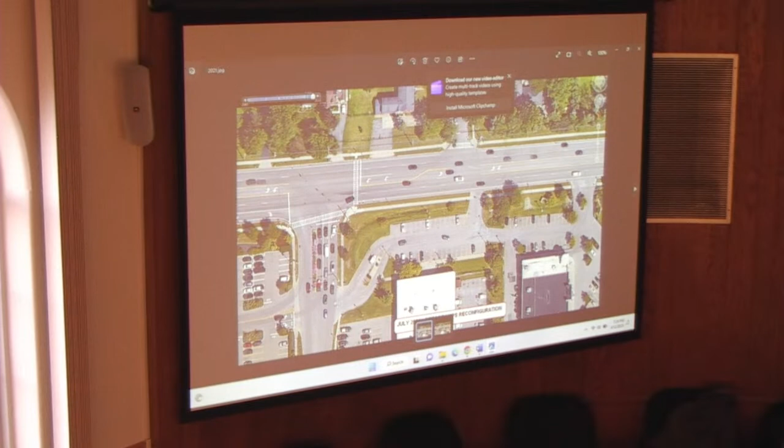So this is what it was, to remind everybody. Just an in coming off SJ used to have a drop-off collection right there, and it was still a no-left-out, but people still did not follow those instructions at that time. Ultimately it's what you see today, which is a more defined right-out. Although you can tell from the disturbance on the ground, people are abusing it and turning left out of there. But now you've got the ability to go out to SJ and utilize the signal to exit. In terms of what that did for accidents...

So this is years and years of accident data. There was a lot of accidents internal in the parking lot, but also at that intersection we're talking about now, Dan Troy and the Sheridan Drive curb cut. A lot of accidents at SJ. Not so much anything here.

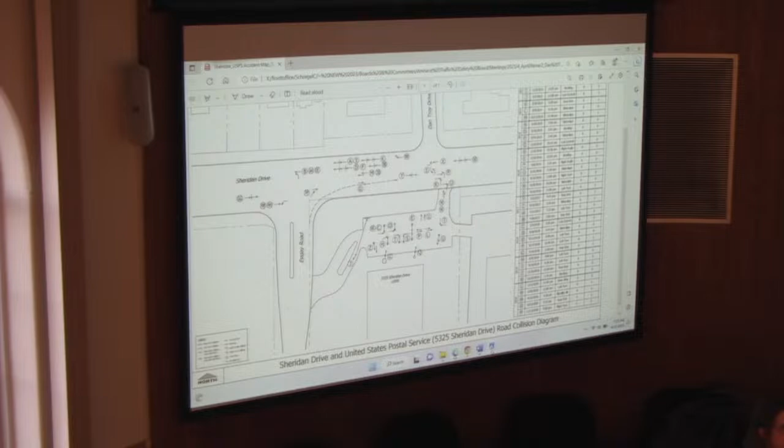So here's what it is in the last 12 months. We've got one rear end, one conflicting left accident, two rear ends on SJ, and I think the biggest difference is you've got two accidents related to people exiting USPS and trying to make it over to Wegmans. USPS did not have any ability to modify the Wegmans Drive curb cut, but that needs to be relooked at to try to prevent that type of movement. But overall, accidents I think have gone down. We'll continue to review.

I don't know, Captain, if you can speak on that, or if you've noticed that — I didn't see anything come up internal in that parking lot, which is kind of odd. Yeah, I only noticed what you did as well on SJ, that driveway coming out, people going across the way. Right, which I believe, if I remember way back, was a concern of ours as well, but they just weren't able to address it. Correct, but there's nothing that I could see any left coming out of the post office.

Honestly, it's been a little while since we sat there. We did do a considerable amount of enforcement over the last 6 years. We've been getting complaints, I know that was a go-to spot for our guys, but honestly we've not been there probably in the last 6 months. But we haven't had any issues either, and we've got plenty of work to do elsewhere. There is a no-left-turn sign at that curb cut on Sheridan, directly across, I believe, as well as at the driveway itself. I think people know exactly what they're up to, and they're just disobeying.

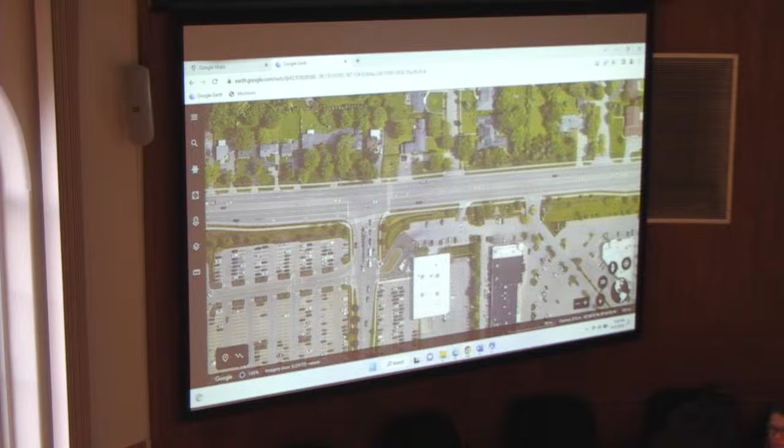So if you're trying to turn on our street, which is Dan Troy, there's a very small turn lane, which is also backed up by a turn lane onto SJ. So just this past week, and I have pictures, this has actually happened multiple times — people actually come down the median towards SJ, go into oncoming traffic to go around us, and go back into the turn lanes at SJ. It is terrifying. It is absolutely terrifying.

When you have children in the car, when you have people crossing the street, it is very difficult and very dangerous. So that's my first thing.

There's speeding throughout there, very early in the morning and through the evening, just because people are trying to beat the lights and there's no one sitting there patrolling.

The illegal turns still coming out of the post office tend to become very dangerous for all of us trying to exit Dan Troy. I have neighbors who are much older and no longer even go to our corner to turn right or left. They will go down Dan Troy and go to Quantico and through the streets to get onto Hopkins or to the other side streets to the lights. It's extremely dangerous there as well.

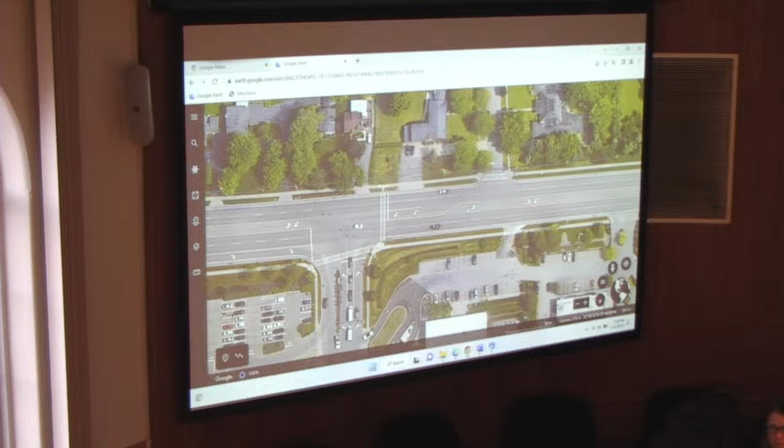The other issue is when you're turning out of our street, people are speeding down the median and crossing over into our turn lane into Dan Troy, trying to get to SJ to go to Wegmans or to the post office. You don't know if they're turning left into the post office because they're not supposed to anymore, or if they're trying to turn and get around you. So there's diversion of people going over to the right, over to the left into oncoming traffic, and then we're kind of stuck.

On top of that, there's also 'do not block the road,' which is Dan Troy. People block that all the time. So whether you're trying to get out and turn left, some people will stop there and not block, so people creep out trying to turn left, but because people are barreling down that median, people get T-boned because they don't know they're not supposed to be in that lane - they're trying to go through the Dan Troy Drive turn signal and then go into the SJ.

So I live in that house right on the corner there. Yeah, right there - not that corner house, the one to the right behind those shrubs.

Also with medians, I'm not sure if there's an option to look into raised medians like we have on Transit Road, but that's one thing we're looking at.

There's continuing issues with the Starbucks traffic that lines up on Sheridan Drive all the way back to SJ. Now with Aldi's, we're very concerned because of the traffic patterns that nobody's going to be getting in and out of anywhere. You have people going in and out of the post office through their parking lots, people cutting from the post office across to Wegmans, and from Wegmans over into the post office. I'm very challenged trying to drive safely in that neighborhood, in that area.

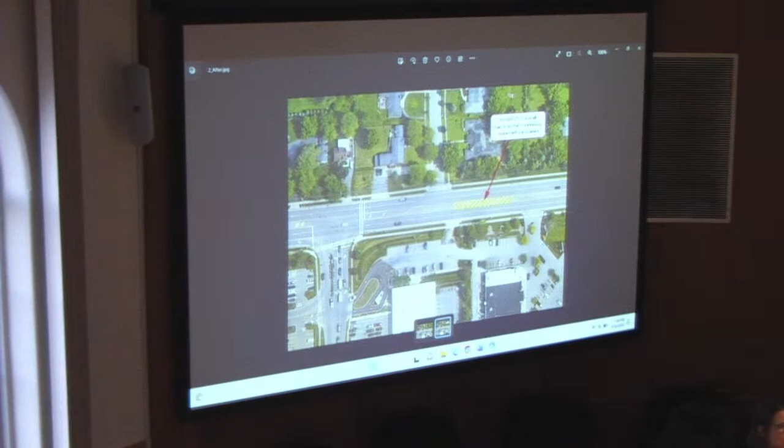I do like the hatching idea, your first idea that you mentioned. I think that's a good solution for that particular problem. The pork chop solution, I think that would probably work too, though I'm somewhat skeptical for some reason on that. But the hatching in particular, I do like.

I think if the pork chop went in the perfect place, it could be helpful. But remember the original concern we had was we wanted it to go further back so no one could try to cut over all those lanes of traffic. We were convinced that people would go the wrong way on traffic just to get around that, and that's actually far more dangerous. That's why we didn't suggest it to begin with. I guess if it's in the right spot, it could help.

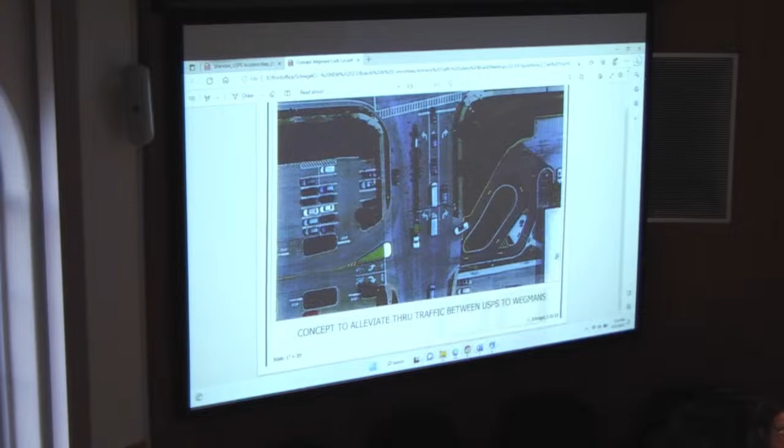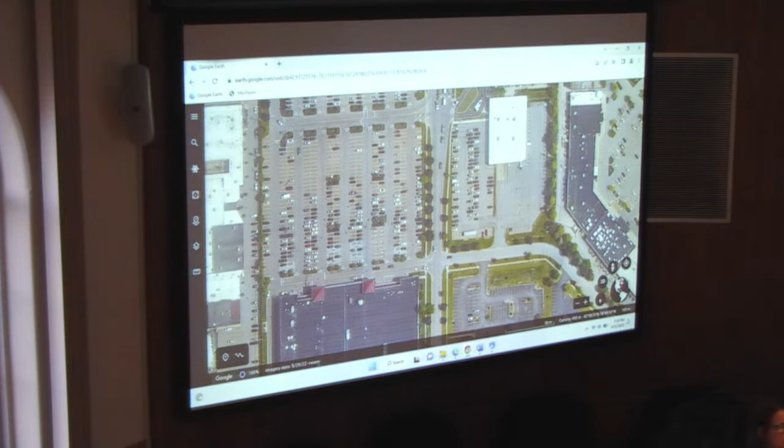So if you're coming down SJ heading towards Sheridan Drive, you turn left now into those drivers that go up around and take a U-turn. Would that be the only option then to get to Wegmans? Well, there's the further back entrance. There's another entrance at the front of the store, right here. Oh, you mean closer to the front of the store? Yeah, that's the way they should be headed.

We got to remember if we tried to implement something like that, we'd have to force Wegmans to do it.

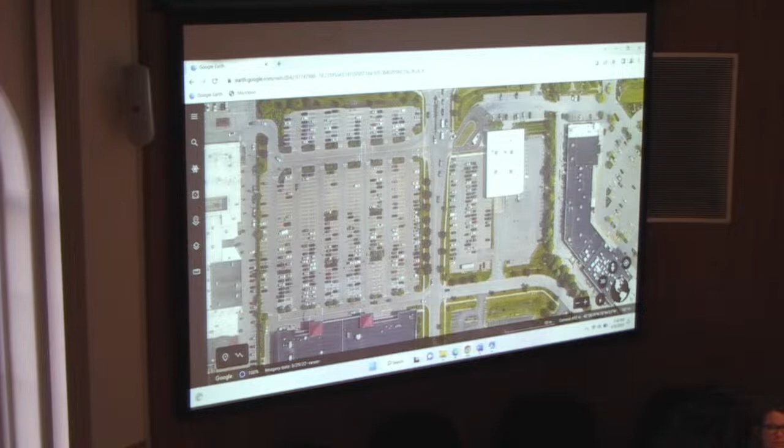I'm more concerned about the entry, to be honest with you, people taking lefts and rights trying to get in and out of our street. We have people, my neighbors across the street, because they have that opening onto Sheridan, people will drive through their driveway.

It's insane. We don't think about it because we don't have that exposure to Sheridan Drive, but we do have cars that take left-hand turns, and we have 3 massive trees in the corner of our lot in order to prevent them from barreling into the front of our house, should anyone ever take that turn the wrong way. There have been several accidents, whether it's been ice or snow, where people have gotten into the corner.

This queuing distance for the left turn is just way too short for the amount of vehicles turning left. But that would come at the loss of this left turn dedicated for Dan Troy, and we'd have a similar situation to what we have at Tim Hortons on Maple, where people are turning left into a left turn lane for a different direction, which we don't want.

In the end, personally, I think your solution here at the end of the day is a raised median that blocks off anybody from the ability to go left into the post office or left out of the post office, blocks off the left turn into Dan Troy and the left turn out of Dan Troy, and then also extends that turning lane for SJ further back, probably to the plaza almost.

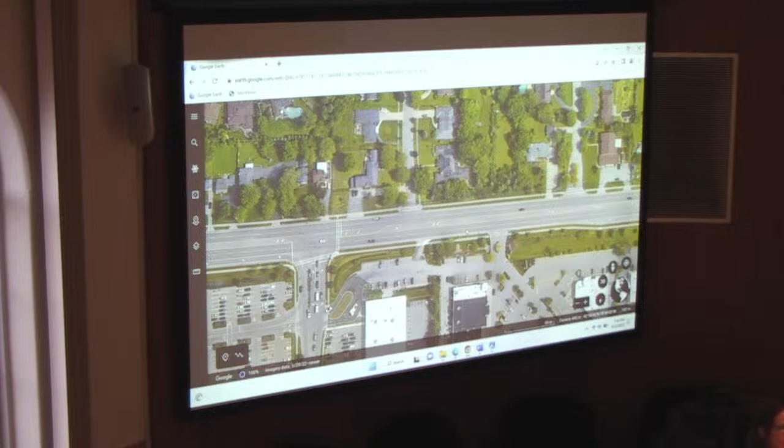That's probably the only way you're ever going to prevent the lefts, but there's a lot to do to get that done. That'll add a U-turn somewhere else though, you have to keep that in mind. And then you'll have people turning into the plaza to go over to the post office instead, conflicting with the Starbucks traffic. It's just a high-density area with not a lot of room, and people are going to do what people are going to do.

It all changes tomorrow. So at this point, Chris, we can send the letter to DOT requesting the hatching. What's the ask? Look at the median, look at potentially striping that hatching. We can notify them of the speeds, signalization, continue with the coordinated signalized plan, and ask can we put in spikes, one-way spikes on the driveway? Maybe mention the raised median as well in that letter, see how they react to it. Please get it in writing.

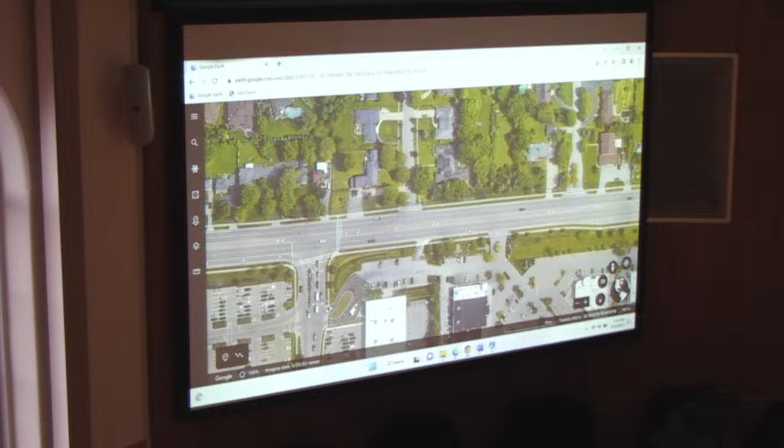Sorry, on the last business that you guys had addressed, are there one of those? We can ask. I thought the reason that was there was simply because it was a fire hall. No, typically when I look at bigger cities they do a crisscross pattern. So this is the abnormal way to use this. You would normally reserve these for intersections, and you can either do the big X or implement these. I don't know of any place else we have one of those in town. I think that only exists in Amherst in front of the fire halls. So you're right in other cities, but I don't know if that's a thing here.

Also, 'block, do not block' doesn't make sense for various grammatical reasons, but whatever. I know in New York City they have them, there they are. I'd have to look at the state supplement to see which ones are allowed. Obviously they put the 'block, do not block' but they might be able to do one of these crisscross patterns.

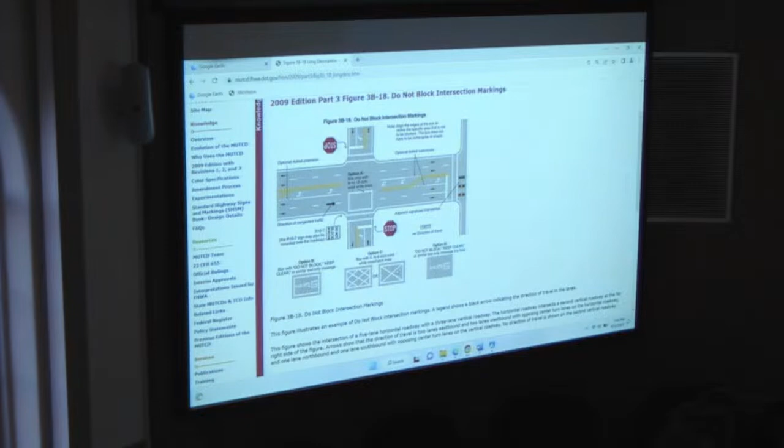Yep, we can put that in the letter, Chris. Other than that, I think the options are limited.

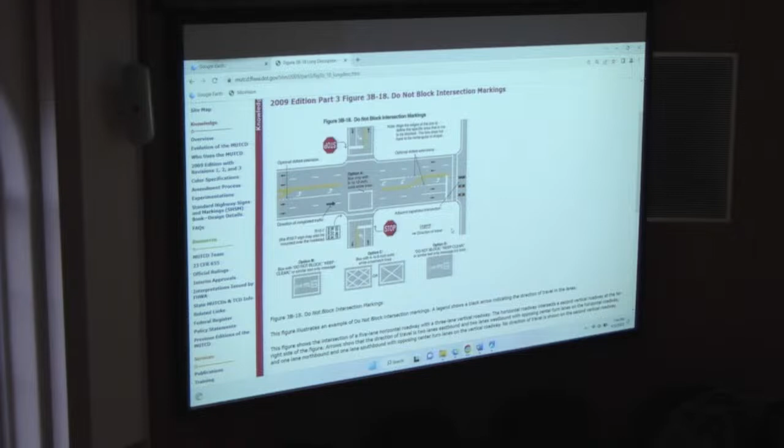Obviously, we see a lot of traffic on the shoulder of the road making the left-hand turn into the driveway, based on the grass being removed. That's in the right-of-way of the road, but I don't think you could put any obstruction there. We wanted to ask the post office to close that off, and they refused. That was a whole thing with the federal government. Because that's a logical solution. I was just thinking, if there was more curbing or something built up on that driveway, that would make it, like, or the spikes.

I think this is a start. Sheridan Drive does have curbing - this is a start, so they're going up the curb to do it. We even looked at this at one point. That was the original one, and they originally asked for that, but they did not like that.

It's supposed to be an exit only going out. There is the one that was done at the McDonald's at Sweet Home and Sheridan, one block in, where they really made that turn that you can't make. They still do it, they did it pretty bad though. I think that one resulted in a lawsuit too. Okay, so we don't want to go there.

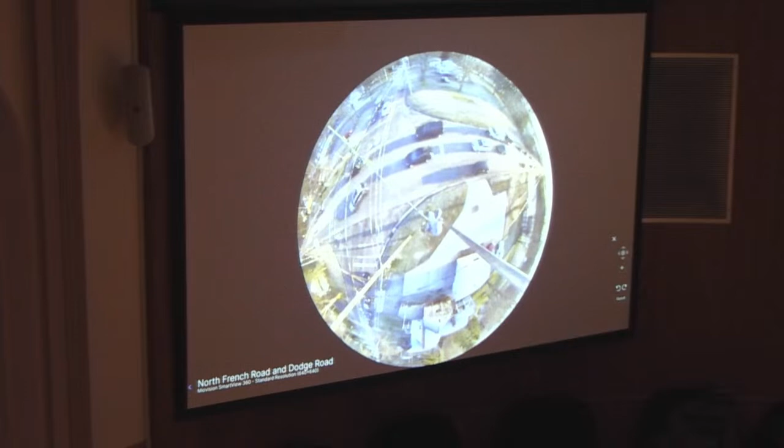Any questions? Any comments from the board? Anybody other than me want to make a recommendation how to move on this one? I said, does anybody other than me want to make a motion as to how we move on this one? Roundabout? Roundabout.

Receive and file. All in favor? Aye. Aye. So with that, Chris, again, the warrants are not met, so the data shows that it's not warranted at this point, so we will receive and file.

Moving to item number 5, Lynette Lane, speeding concerns. So this is part of Preserve at Muir Woods subdivision. There's a request that came in specific to the speeds along Lynette. If you recall, when this came in years ago, this used to be a dead end. You can kind of tell the difference between the established street and this new subdivision. The connection was made, and I got 2 complaints, one from the new area and one from the old.

Looks like neither of them could be here tonight, but we did deploy a speed counter mid-block. Those results are in your package and now going to be on your screen. And honestly, not too bad.

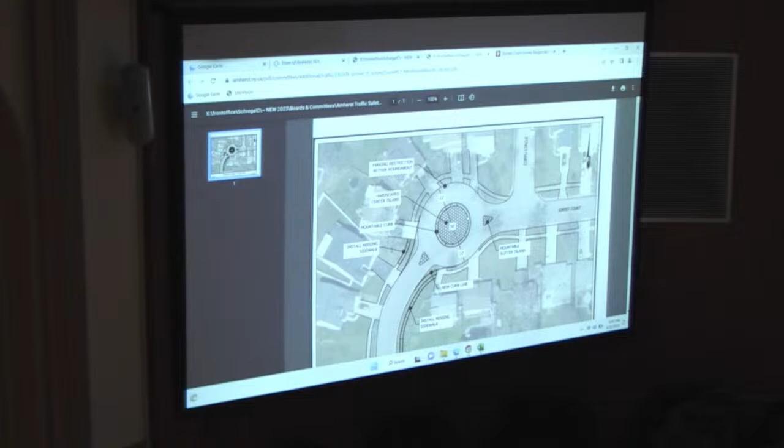Any other comments regarding attendance concerns? I appreciate the work that all of you guys do. This is, in all fairness, mostly a thankless task. I've been in enough of these meetings, and you guys have too, where no one comes and says traffic is right on my street and everything is going just fabulous. It's tough to give up an evening once a month to do all this. I know that, and I appreciate it. Of course it's just one person, but still, I want you guys to know I appreciate it.

I'm going to do my best to fill the open seats as soon as I can. Thank you. I haven't had anybody reach out to me yet, but I'll put the word out through social media and other locations, because I think this board functions best when it's fully staffed.

Any other old business to rekindle? Chris, I do have one thing, and this is going to go back way back in time. If you could look into it potentially and let me know, we did a bunch of work probably right before COVID regarding the intersection of Hopkins and Klein, where the county was looking at a potential capital project there.

They were going to do some work study there. Just curious, based on the state of some of the curbing and road conditions in that area, if there's been any action from the county to move forward with study work that was stopped by COVID, if you know anything there. I don't know of any action. Okay.

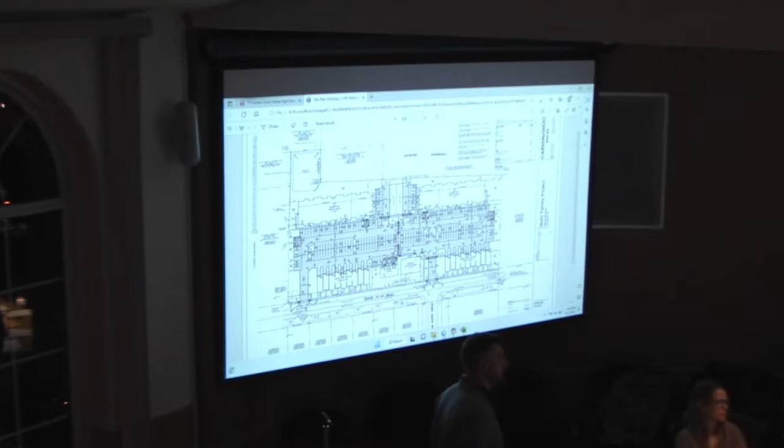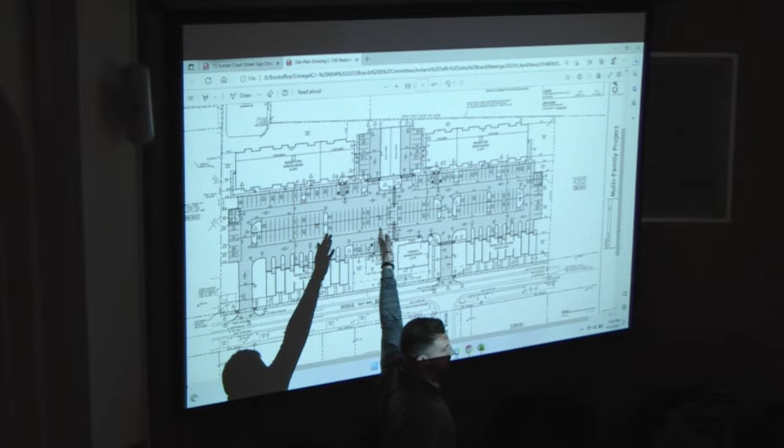We're turning it into a parking lot. This is 112 residential units being proposed. You'll see along Dodge Road there's two masses - these are two-story townhouse buildings, each of them have 9 units, so each of them 9 townhomes. Clubhouse, maintenance building, small dog park for amenity, and then along the 990, 5-story residential multi-family units. So kind of a mix of densities here on one site.

What our department is exploring, and Chris can probably talk more about this, is a connection to the east. This project is also owned by the Green Organization, or was developed by the Green Organization, so this to us seems like a logical connection. Well, and it's connected now. Yeah, and it's connected now, but to kind of memorialize the physical connection as a plan. So we're always trying to eliminate curb cuts where we can - it's referred to as access management.

So there is potential, since there's a common owner, to potentially consolidate these two, have a shared access, or just close one or the other. Why does this keep doing this?

So you'll notice too, when this comes back up, Chris, if you want to - just real quick, the piano store, does that go away too? So that is gonna stay, from what we can tell. It's not represented, it's just kind of off the western boundary of this project. So I'm not sure if that's gonna become a future acquisition or if it's just gonna be shoehorned in there, lay there, yeah.

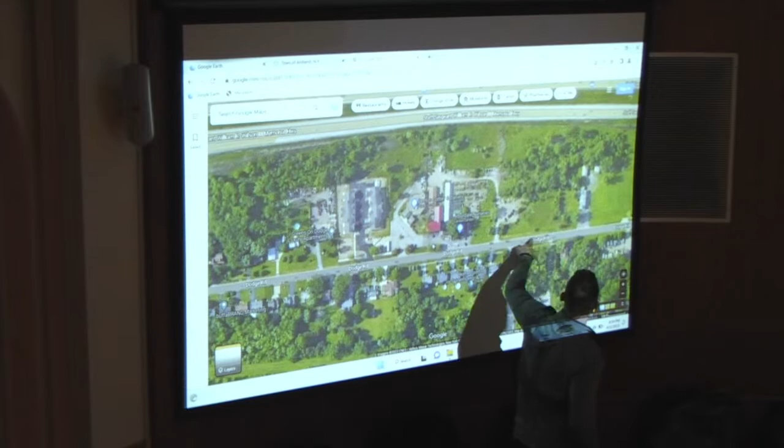But you'll notice too that that's a pretty large chunk of vacant property that's undeveloped. So what we're gonna try and get them to do is also connect access to the west - give us a stub or at least a reservation with an access easement so that in the future, if that western portion of the site, or eastern parcel, is ever developed, we have again more access management and logical connection. So that sidewalk is gonna connect to the sidewalk that's stubbed on the other one.

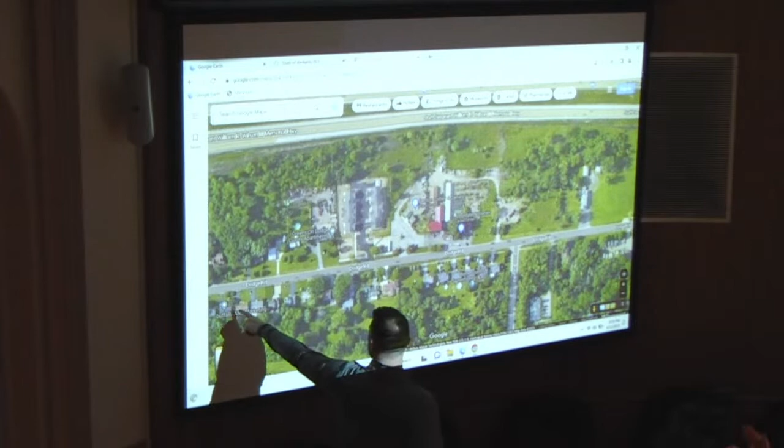Yeah Chris, can you go back to the aerial? So there won't be like a gap? Yes, there's only - they'll connect, yep, through all the driveway openings too, so.

They have some tweaking to do - they're not quite jiving with the fire department as far as what they need to see. So this may change, the massing of the buildings may change, and some circulation may change on site depending on how the fire department wants to get their trucks around. But this is kind of what we're gonna be looking at.

We might have them break these buildings up to create kind of a little parklet in between, just so that there's not really like wide massings on Dodge Road, but that's this in a nutshell.

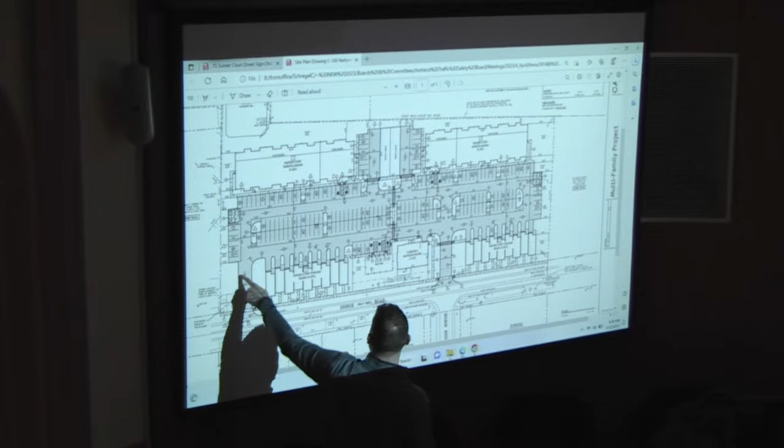They're almost perfectly parked with I think two per unit at least, some extra spaces left over. And these are all rear loading driveways for these townhomes. So this frontage would be Dodge facing - your front door will face Dodge, but all the units will be rear loaded for the garages.

So in terms of the site itself, they did do a decent job with pedestrian movements, I thought. I did ask them to come up with a stop sign warrant analysis at Dodge and Robin. I haven't heard back from them - I just wanted that for the record. I don't think it's going to meet it, but it's good to have.

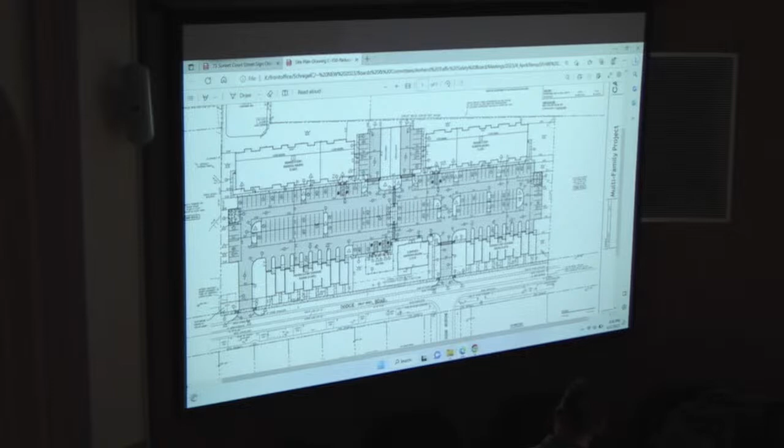So aside from this curb cut and the connection to the east and west, I don't really have anything, but I'm open to your suggestions, comments. I do have two comments on this one. Tom, why isn't that drawing in their study instead of this cartoon thing that they have? So it's nothing, Dan - as I've circulated in the past, this is always available on the website.

We have a link for all these plans if you want to look at the full versions. Unfortunately, we can't circulate the paper. Scott, why don't we have something like that in the TIS? A lot of times this is just a context location map, so they're just showing you where the project is.

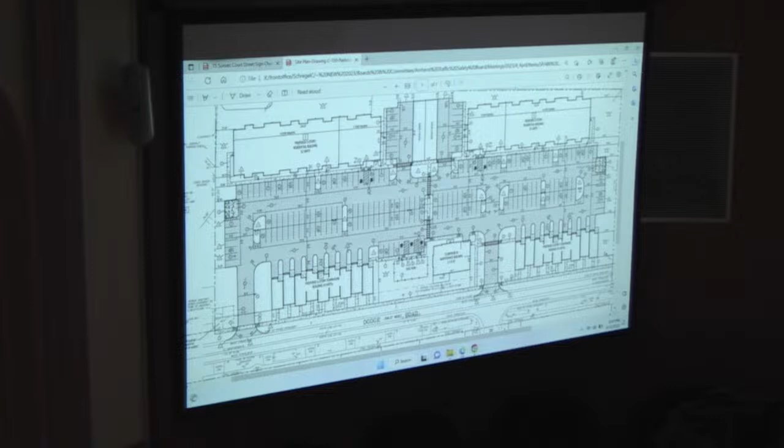Yeah, and it doesn't show where the curb cuts are. Yeah, but that's just a traffic study. Right - they're probably not including the curb cuts because they're saying that the amount of traffic that's gonna be entering and exiting these isn't gonna warrant TIS. So what, the 100 units are probably gonna split between these driveways.

And they're looking at... let me look. It's the larger context of Dodge Road. I don't know which diagram he put up there, but this one. Tell me what that tells you. So this tells me that they've looked at...

These are the intersections and access points that have been studied, 1 through 4. So they are looking at the driveways. That's what those two, the red one and the other one, are driveway access points. So anything that's numbered has a level of service and a capacity analysis conducted in the report.

So we can look at that. Here we go, that's in the body of the report. Yes, it is. Here's the capacity analysis, so these numbers match up with your figure. One is J.J. Audubon and Dodge, and this is that easterly driveway. Note that it's got a U there, that means it's unsignalized.

Because I went through these, got it, but I went through them. I just have a problem with a low-quality sketch. Okay.

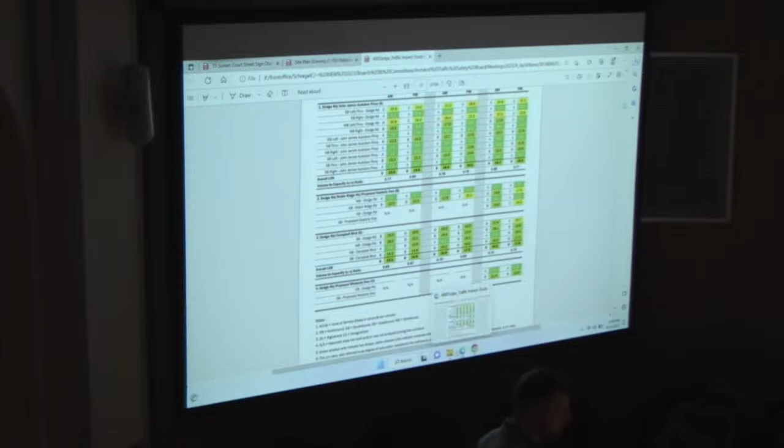I have two comments, Chris. First one, can we ask them to put stop bars on the exit of both of their access points? Yes, and it should have stop signs. Perfect, thank you. Good, appreciate that, thanks.

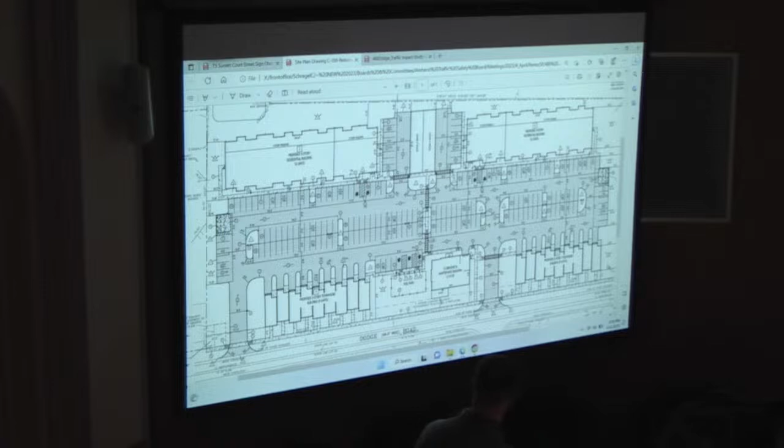The other thing I was thinking was, since Walton Woods is just south of here, if you cross the street and go down Robin Ridge Road, the entrance to the trail that goes to Walton Woods is right there. And since this is, I mean, how many units is this? This is a ton of units. And if they have a dog park with their dogs, I assume people would want to cross the street frequently to go to Walton Woods. I know I would if I lived here. So I was thinking, could we ask them to put in an RRFB or something like that?

I mean, there are 7,000 cars a day here. I don't know if that's something we should consider. Personally, I think it would increase the amount that they could charge for rent, but that's just my opinion. So they would have to acquire a highway work permit for that, but we certainly can ask for it. It's well within the scope of this. Thanks, Tom.

It is a decent plan. I mean, once they cross, where are they gonna go? If you zoom in a little bit more... the entrance, no, keep going. So the entrance to the trail is right there at Robin Road, at the corner of Dodge Road and Robin Ridge. If you go down, right there, the trailway entrance is right there.

Yeah, but how do they get there? There's no sidewalk on Robin Ridge. I guess it wouldn't connect. Property lines there too. Sounds like an opportunity to build more sidewalk. I just know personally, if I lived there, I would definitely go right on that trail and walk in there very frequently. Yeah, I get it.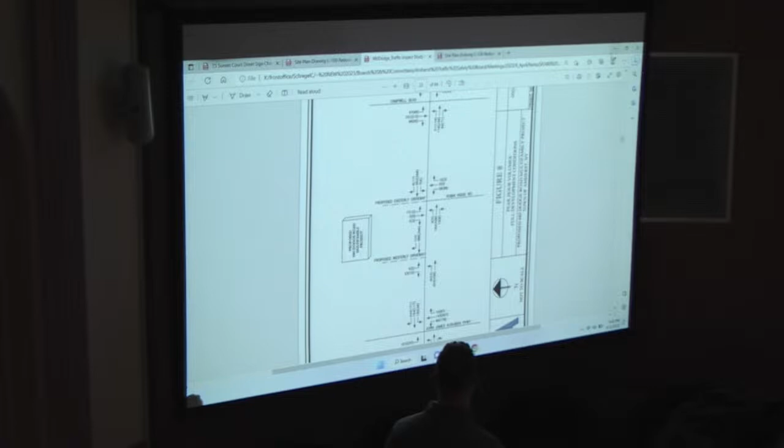Is it geared towards family or towards student? It's not designated as student housing. No, it's not student housing, that we know of.

That's something we can't necessarily regulate unless it's officially a dormitory, which requires a special use permit from the town board. So the only way we'd be able to tell is through floor plan design, if they were allocating a common area with units each having an ensuite, then we can say this is clearly meant for individual dwelling units inside the apartment, not a family.

Not to my knowledge, but they're certainly going to be able to take advantage of a student population seconds from campus.

Okay, any other comments? All right, hearing none. My comment — we're going to do Costco.

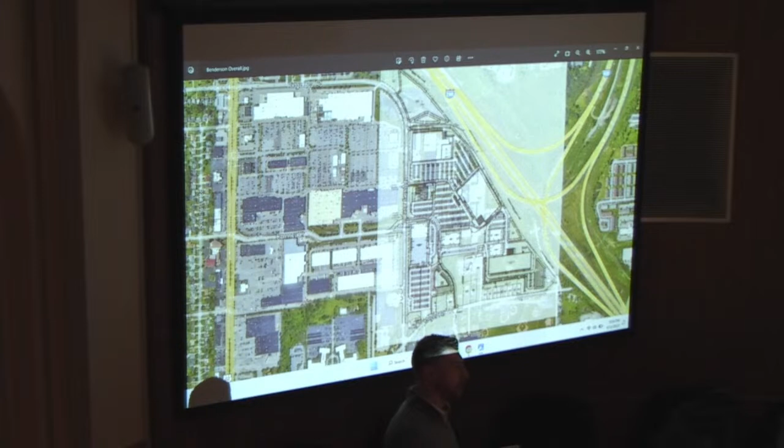Before we dive into this, because there's a lot here, I want to mention that we did our initial review, and we pointed out some larger issues that require substantial redesign on their part regarding interior circulation and parking. So this site plan is not indicative of what will be revised based on our comments.

So Chris and I thought it would be better to focus on larger contextual issues — pedestrian access, bus access, bike access — not just for this site, but for the area as a whole, as this ties into other developments that surround it.

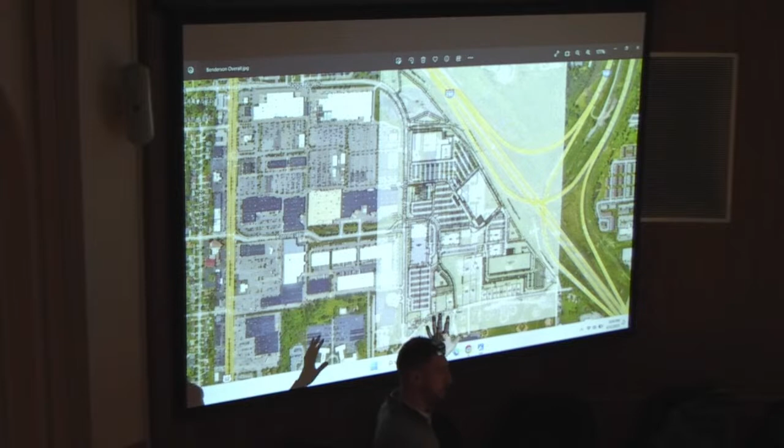I just put this together quickly this afternoon so you guys can get a feel for how this site is situated within what's existing, and how some of the interior circulation is set up, before you start. This is going to come back to you with a revised set.

So this is not your last opportunity, but we don't want you to get hung up on this spot conflicting with this drive aisle — that interior stuff is going to change. But definitely look at the access points. In a nutshell, they are extending Beaumont Parkway.

This is an all-way stop, continuing to the north, then turning into Romney. Romney would be reconfigured to eliminate this offset intersection. Right now they are showing a new signalized intersection.

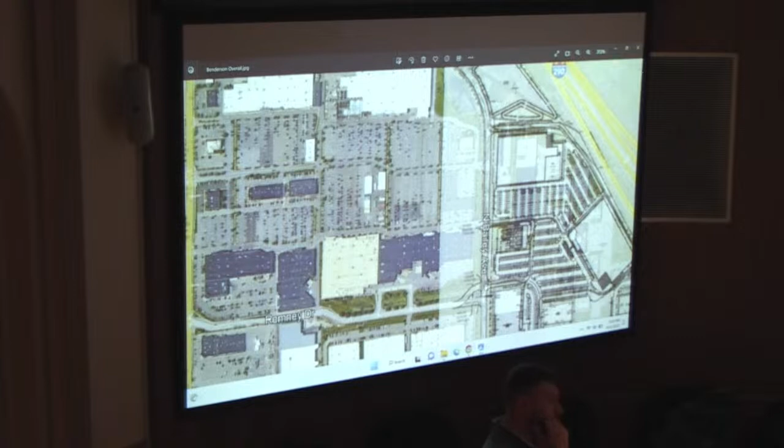Likewise, it's this one, right? No, next one — it's that one, by Best Buy. This nearby intersection would also be signalized. These would be coordinated, and there are no changes to Bailey Avenue at this time to widen it.

This falls within the Boulevard Central District, so essentially a GEIS has already been performed, and all the developer needs to do is write us a check based on the number of trips being generated. They provide the check to the town, and the town decides what to do with those funds in terms of the overall transportation network.

Maybe that means improving the Meyer intersection. Maybe that means dual lefts off Maple onto North Bailey. Maybe that means widening North Bailey. It's really up to us to take those funds across this entire redevelopment central district and determine the best use of those mitigation fees.

That's a good point, Chris. Can you go to Google Maps? Is Bailey a county road? North Bailey is a town road. The Boulevard Central District goes from the 290 down to Sheridan, over to Harlem, and back up — it's this whole triangle of land.

Part of that process in the Boulevard Central District GEIS — the Generic Environmental Impact Statement — is done to program or precipitate full build-out scenarios, so that it incentivizes development within this area.

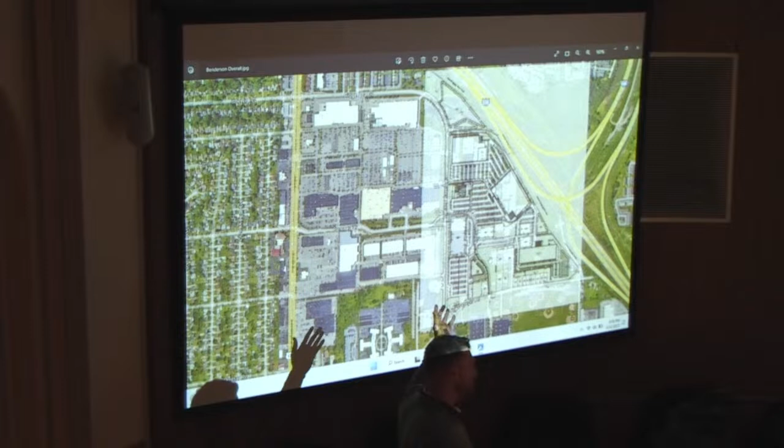Which is more intense in a way than what this is. So don't get caught up in the TIS thinking they're trying to pull one over on you by saying there's not going to be a significant impact.

It's just that this has been studied for what most would consider a more intense version of development in this area, so this will not, in their minds, hit the thresholds for a lot of those mitigation techniques. Yeah, that's a good point.

So the TIS is specific for access points. We're looking at Meyer and the 2 signals - it would be 3, 2 signals and another driveway to the north. That's all that they're required to look at for the TIS.

It is up to the town to review their information for the entire network within this BCD. We have hired an outside engineer, and they are currently reviewing this plan as well as the entire BCD area to see where the mitigation fees would be best applied. So there are other eyes on this besides this board and staff.

We needed a fresh look to see if the mitigation numbers needed to be tweaked or if those locations for mitigation need to change. So just to let you know that that is occurring concurrently with this plan, and that this development, this project specifically, wasn't looked at in a vacuum.

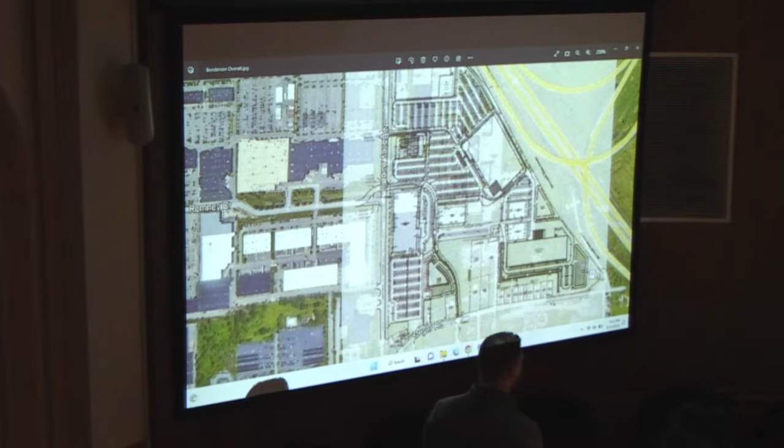So Chris, my concern on this plan that's up there is the warehouse. Is that in scope or no? Yes, so - we're talking the soap plant? Yeah. So this whole thing is one site plan. This is all under review right now, so every aspect of this, including the blending facility, is part of this.

And Key Bank - but Key Bank, you guys have actually seen before not too long ago. They did some substantial improvements to it because they're increasing employment. So this whole thing is under your purview right now as to the traffic plans.

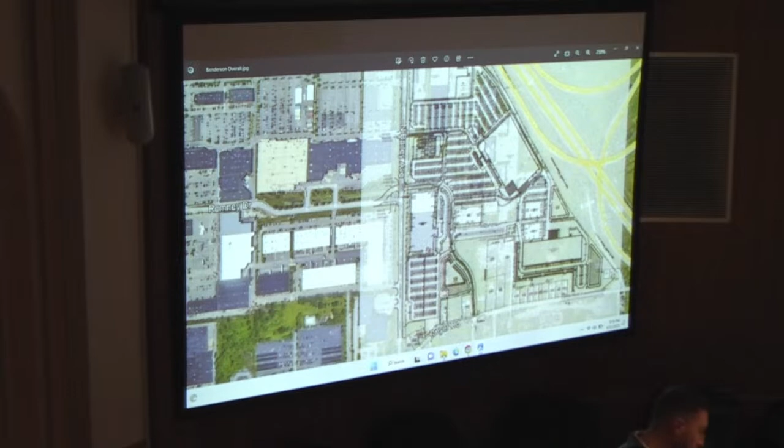So how are they getting the trucks in and out of the warehouse, and how is that being addressed? I'm going to bring up the trucking plan. So that's a good point, that's a good transition. So what they provided for us is a truck routing diagram for the entire complex, which is Amherst Conference Park.

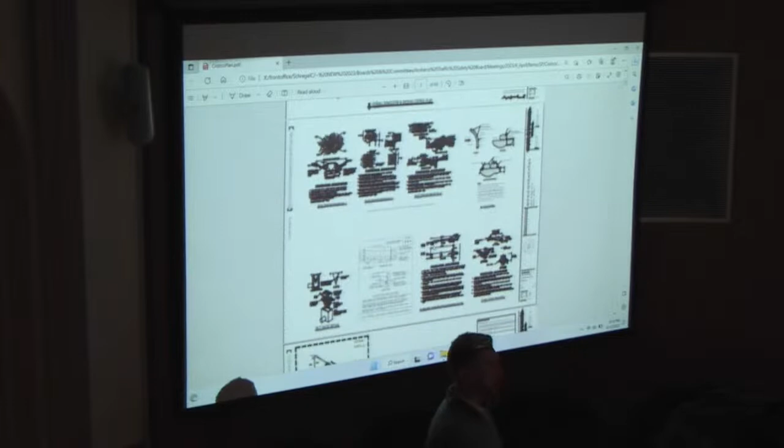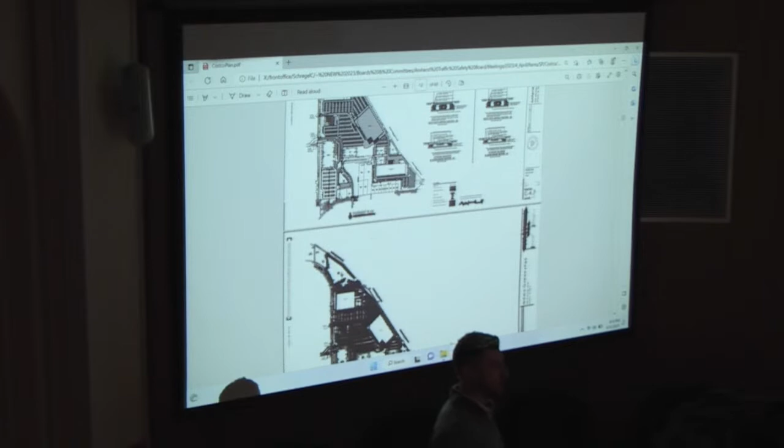And Chris will show you - it's broken up into multiple sheets. They have an overall trucking plan. It's right here. Oops, one more down. Come on, you can do it.

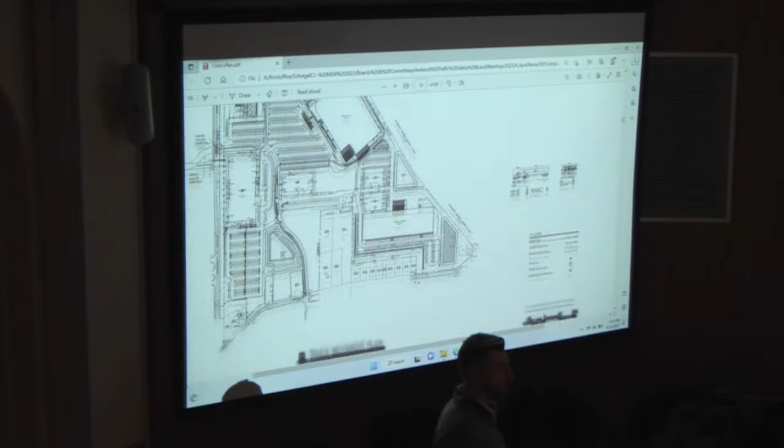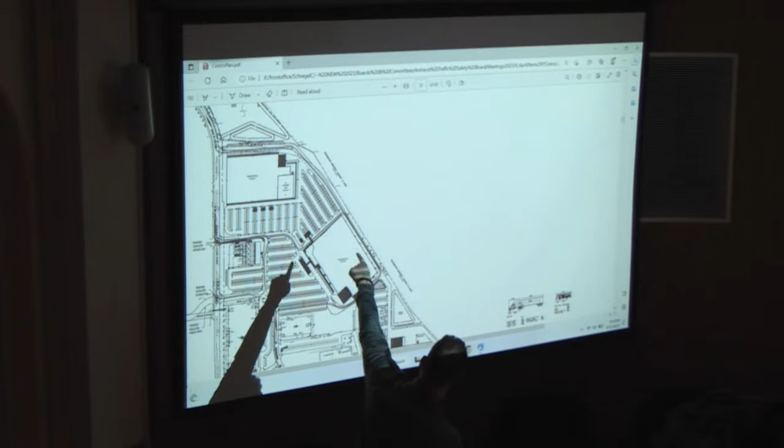So what you'll notice is trucks are coming ideally from the 290, coming down Ridge Lea, coming into the north curb cut of the site - or scroll up even more. So they're coming down toward the intersection near Costco, around this loop to make deliveries at Costco, and then further down to access the blending facility. They loop around, come back up, out, and then down to Meyer Road.

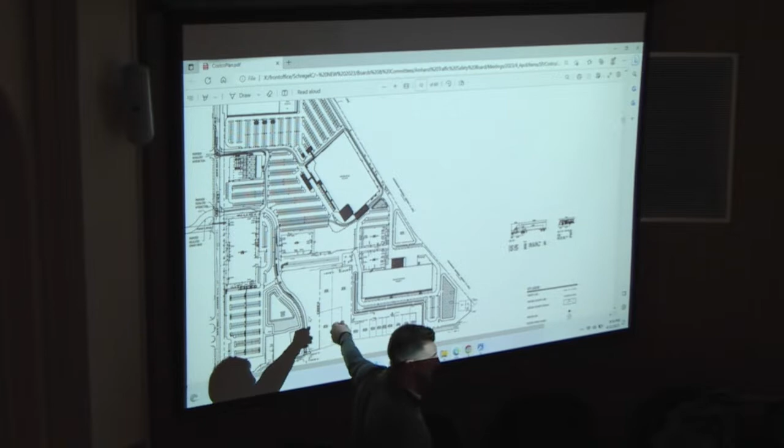So one of the things that we identified is we don't support any truck access to Meyer Road. I think it's unnecessary, so we've asked them to look at how they can get trucks out of this facility without pushing them down on Meyer. But we're still taking the trucks through all those parking spots.

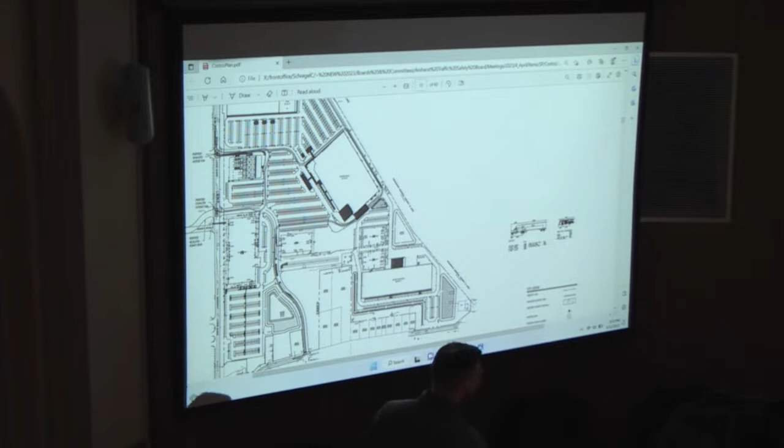I'm just looking at the bottom part, that one row, where you're saying they were going back out. This here? Nope, down that one there. Yeah. So there really is no road, right? Right, there's none - so they're gonna have to go through parking spots in order to, I mean, I understand going back behind the buildings, coming around, it's keeping the trucks out of the parking lot. You're gonna have a little bit up the north end, but right there, there's like nothing.

Yeah, so this area here is kind of undescribed as to what's going on. I'm not sure why this is even necessary as a row of parking stalls.

We're thinking that they're anticipating further development in this area, so we've asked them to take a look at this and say, is it really necessary for access to facilities? If there were future development, pavement and curbing could be installed at a later date.

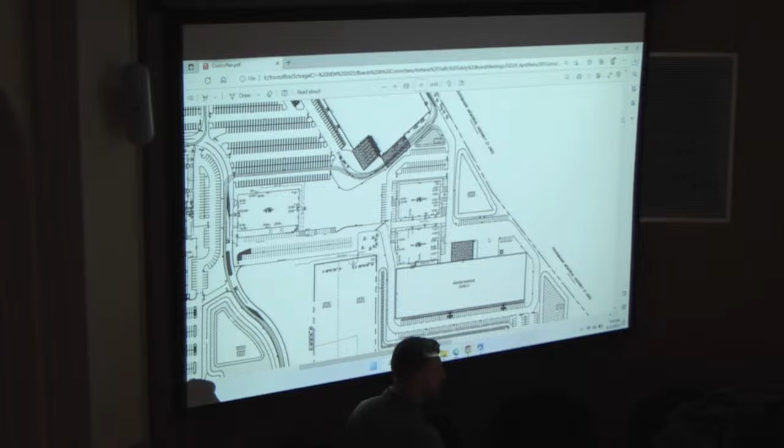So what we're trying to avoid is semis using that Meyer access, but it's going to be a lot of box trucks potentially. We feel as though that should be for passenger vehicles. Yeah, it's hard to police that. You're not going to be able to say no box trucks. Well, you can set a weight limit. And to piggyback on that, Eric, having semis drive through a parking area where you've got cars backing in and out and pedestrians, that's concerning.

I understand. What's wrong with the trucks going out the same way they came in? We're encouraging them to do that, it's just not direct, you're going through parking aisles. That's all. So this one was troublesome too.

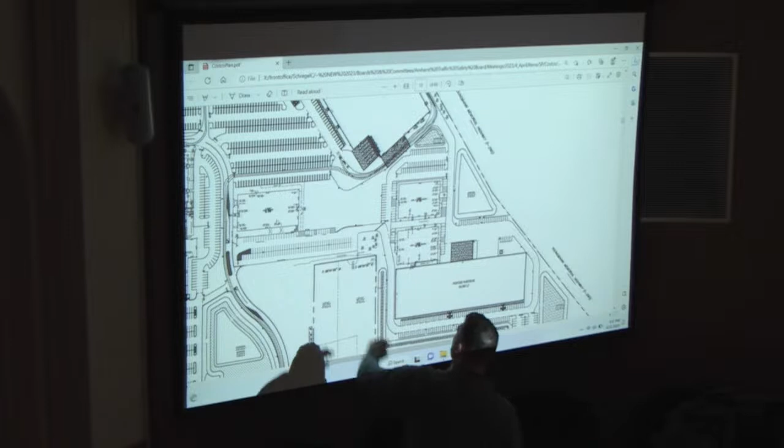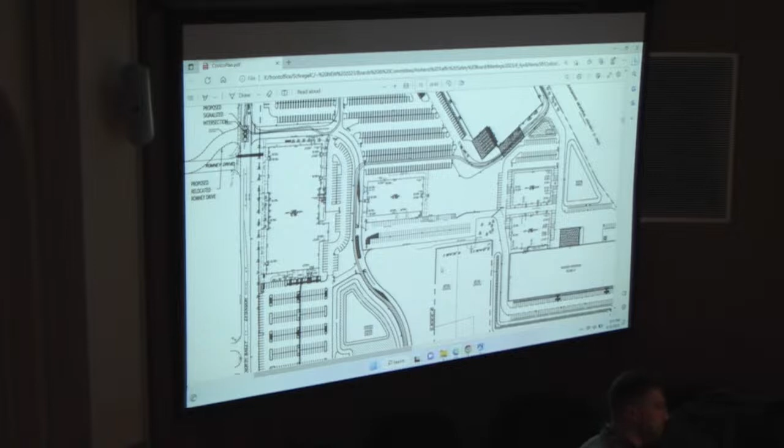Could we, like Dan was saying, just make them use that back alley, go up behind the building the way they came in? Yes, we certainly can ask. We've asked them to look at their truck templates and say what's really necessary, what movements are for the existing buildings in there. We don't want any of this driving through parking lots, right? As much as they can, stay in the back of everything.

One of the things I mentioned earlier is the introduction of parking rooms. So what we're trying to do is basically access management, but internal to the site, creating interior roads and private drives with limited access into parking fields, so it's not just slots of parking with uncontrolled access into it.

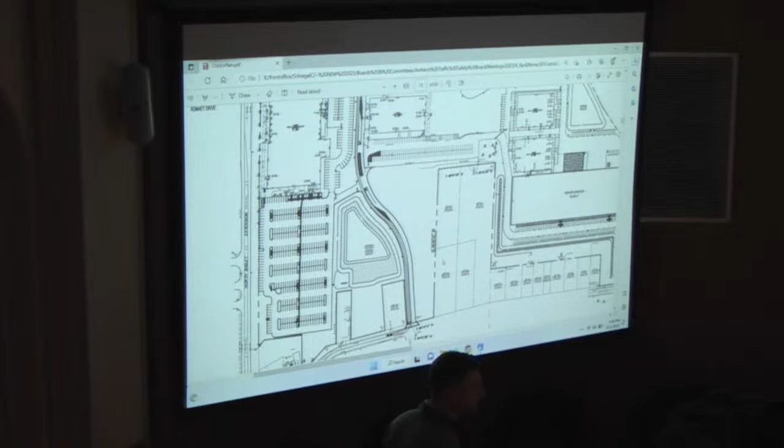It's great traffic calming though, nobody knows where anybody's going, can't speed through that parking lot. That's one of the things that'll change. You'll see, Eastern Hills is just potholes. Traffic control through potholes. And that road that connects to Meyer is slightly offset, but I think that's because that's where the property lines are, they've made it as straight as they can.

Yes, I noticed that too, Jennifer, but it seems excessively wide. It's 36 feet. If you narrowed it and hugged it to the left, I think it's that wide to accommodate the trucks. So if you made it 24 feet and hugged the west side of that property line, it would better line up. I don't like the misalignment, and it's going to be a comment.

Chris, the two new signals on this project, those will be smart signals? Yes, it will have to meet our town specs. Okay good, I'm glad you mentioned town specs. So do I assume every signal light the town puts in the future will be a smart signal, no matter who pays for it? Correct. Okay thank you. Do they have to be signals?

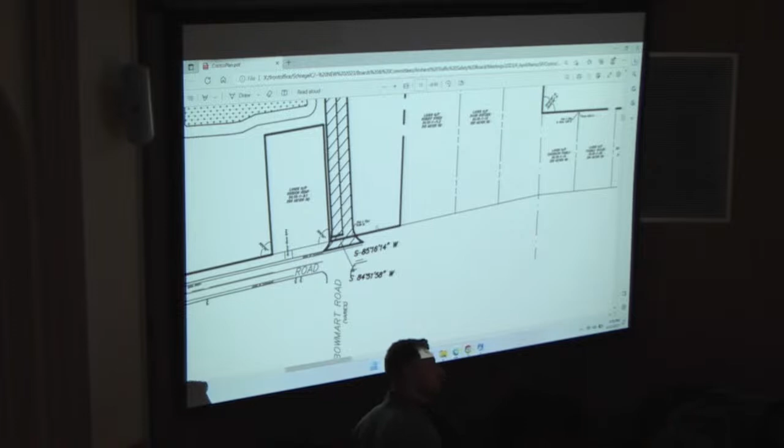No, what would you like? A roundabout? So yes, roundabouts definitely should be in the discussion. I like the roundabout to roundabout deal, just like Cheektowaga has, talking roundabout into a roundabout, figure Romney and Best Buy, the ones mentioned in the report here.

Okay, they're already signals, right? Nope. Romney and North Bailey is not signalized, and Best Buy is not a signal light either, but these would become brand new signals lights. Correct. So I would like to see how that would look if they made those roundabouts instead of signals. Is anybody opposed to them exploring roundabouts on this board? Okay.

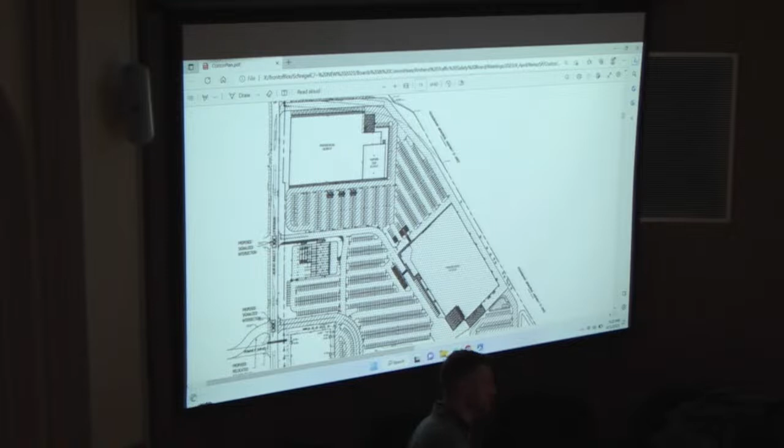They've got to be designed to take a truck, right? Well, do they both have to be? You could, but I'm saying if we're concerned about truck traffic going into one end of the building, if you wanted to choke down the trucks, you could make one of them a little bit harder for the truck to navigate through, to help do that.

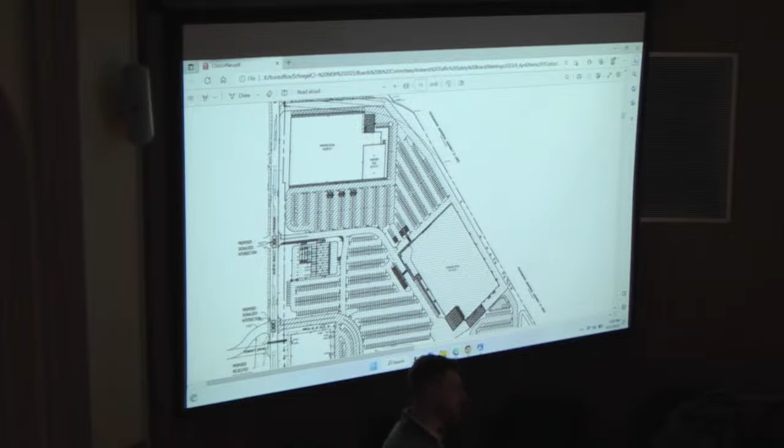That's why the engineers get paid big bucks. I didn't hear it. Oh yeah, sure. That right, Jennifer?

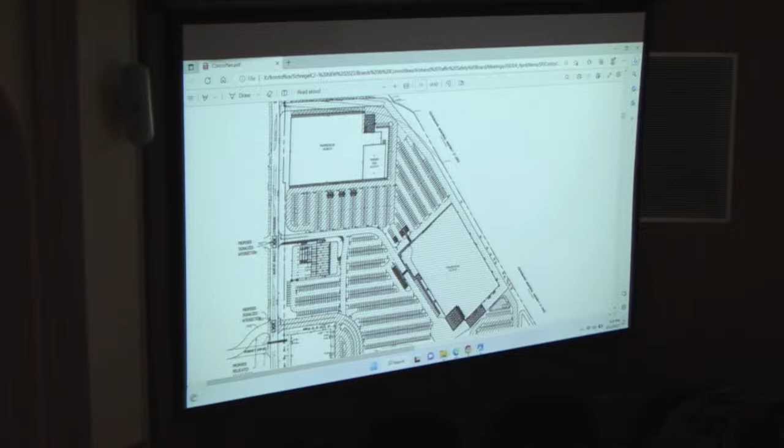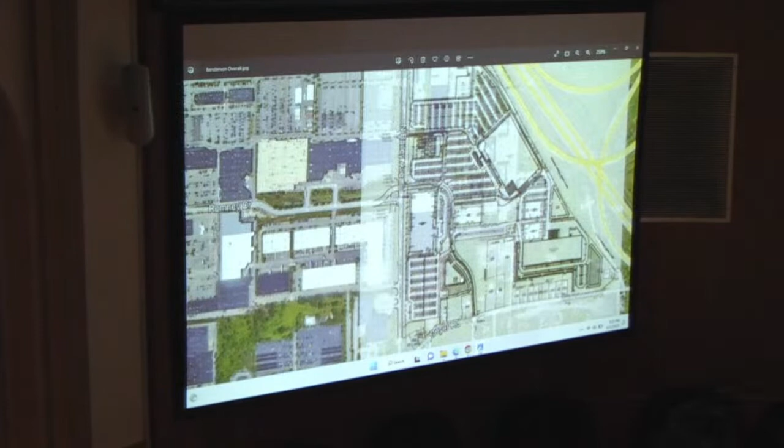I don't know if this is something we're talking about for this site plan or if this is too minute, but the main thing that sticks out to me is the lack of pedestrian accommodations at all. There's very minimal sidewalks. Yeah, which seems like a very large oversight. Even the one across the way has more sidewalks, like the Commerce Park, which has sidewalks protected in between those lines. It just seems like there was really minimal consideration for pedestrians in this design, and I feel like we should ask them to provide a complete sidewalk network within this development.

Do you think people are going to walk into Costco? I mean, I might walk to this. No, I'm saying from the parking lot into Costco. Right.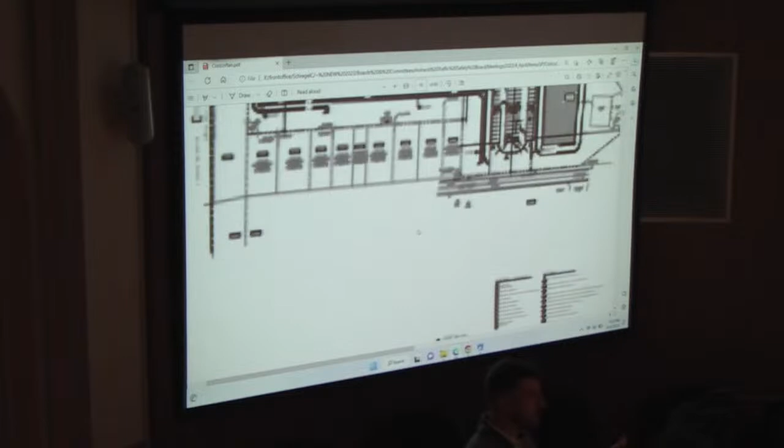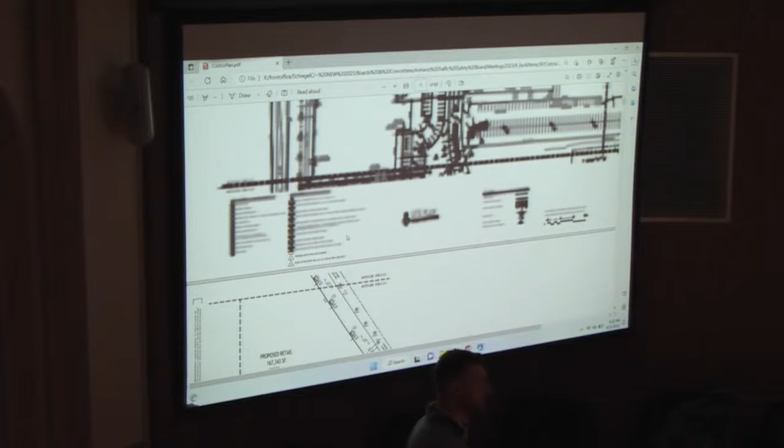Think about the people getting off the bus. Yeah, there's a bus route right there, at either Costco or Dick's or Delta Sonic. How do they get to the site? Yeah, and there is a bus route right on Bailey, North Bailey. I don't know how many you'd get, but are you going to get people walking from the Best Buy end of the plaza over to the Costco and Dick's? Yeah.

Bridges, pedestrian bridges, or pedestrian tunnels. But I agree with you though, Tom. Personally, I'd love to see, if it does end up being traffic lights, a complete four-legged crosswalk across both of those. If it's roundabouts, I'd like for there to be some pedestrian consideration to allow people to cross the street. You'll notice there is an existing sidewalk on the west side of North Bailey. So it's there for the taking.

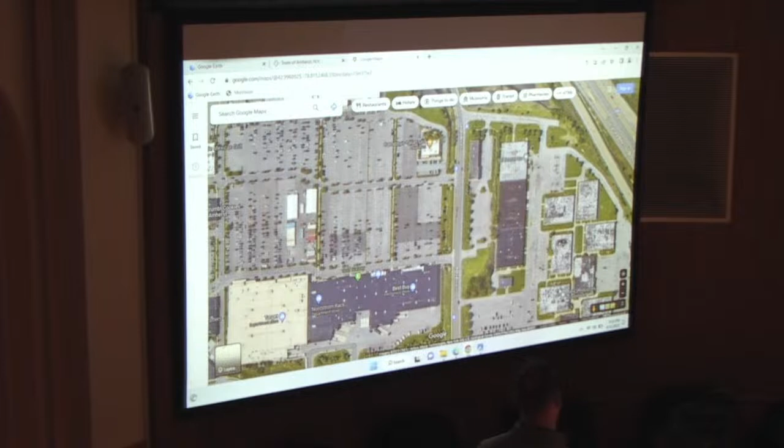Accommodate connections across North Bailey into the site. Is there a reason why they're not requiring it or showing it on the east side? Yeah, I feel like that should be required, right? So it is required, I don't know what their scope of work is for covering the ditch. I mean, with such a massive project, I feel like that just has to be considered. Or mandatory. We would just create sewer. Costco doesn't have...

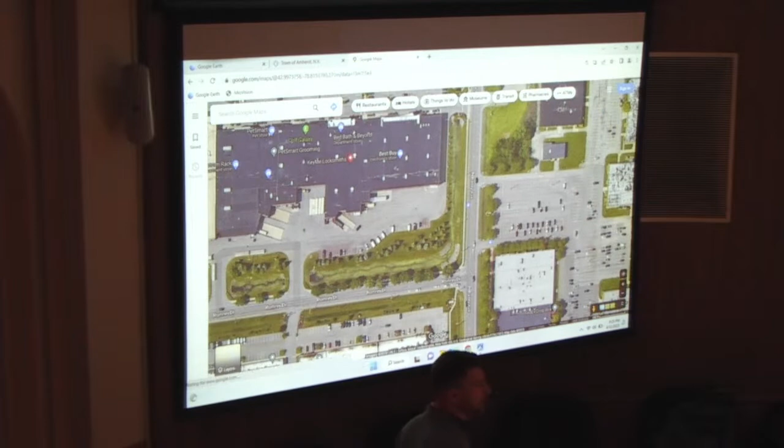Where does that crosswalk go to? Which one? Okay, it does connect. This is actually striped. And where is that? Isn't that striped now? It could be an older one, what is that? I'm pretty sure that's striped now, but it's not protected, it's just a crosswalk. So who did that? No, it was put in as part of Key Bank, maybe. Yeah, but it is uncontrolled.

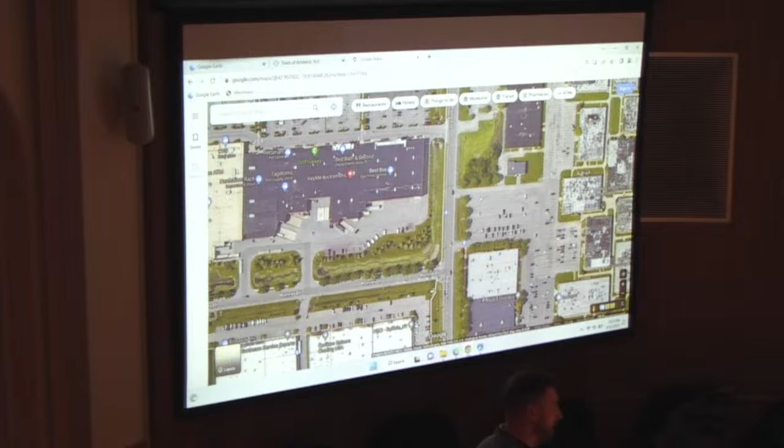Okay, so more pedestrian circulation, sidewalks on Bailey, crossings. We've reached out to the NFTA to see what their thoughts are on the locations of their stops, whether they're willing to accommodate potentially moving or adjusting them based on where the access is going to be for this site versus where the access is to the west. We haven't heard back from them yet, but we made an effort to include them because there are some bus routes along Bailey.

And there probably will be a decent population of people that take the bus to work at some of these places. For sure. Anybody have any thoughts on the Beaumont extension? It shows that about 29% of the vehicles going to this location are going to be utilizing this. I personally like to get the vehicles off North Bailey, but I just wanted to bring it to your attention, see if you guys have any comments.

So this is signalized at Maple. That signal has capacity, that's for sure. I mean, the one thing that side has going for it that the other side doesn't is that Maple doesn't have a connection to the 290. So at least there wouldn't be people getting off right there and then going...

Where's the train? That would technically, in theory, go right along Maple. It would cut right across the parking lot of the mall and go all the way down Maple. I think it goes underground for a bit, right around there it goes underground supposedly, and then re-emerges right before it gets there. Yeah, it's gotta go underground to make the turn on the street. Oh yeah, okay, perfect, because it can't make that turn otherwise. The train's gonna have to go back underground?

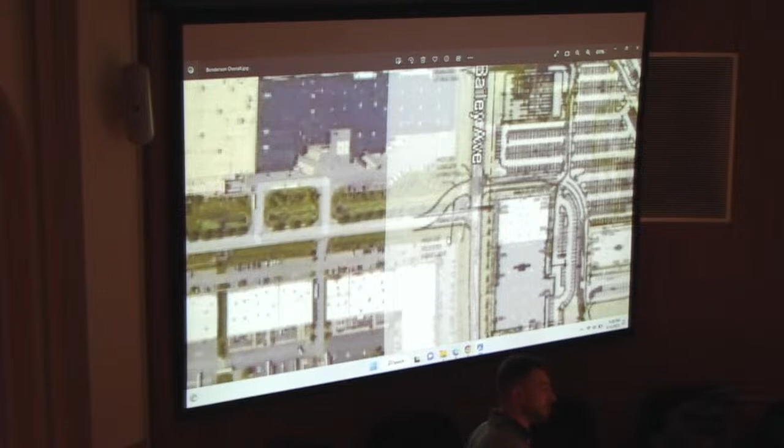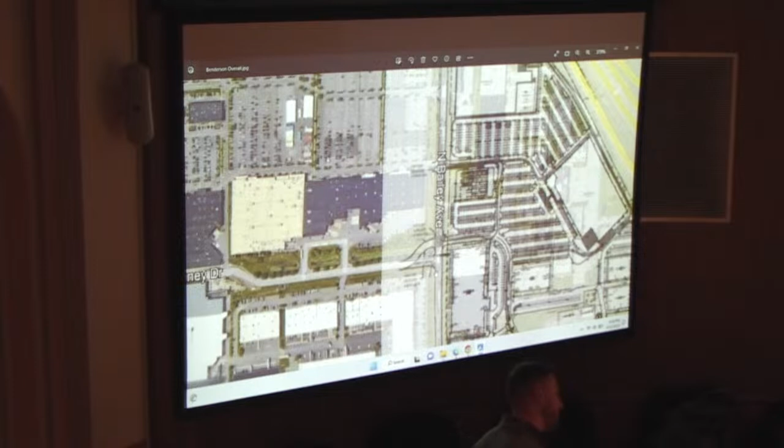How does that play into the discussion of Benderson taking over Romney? Oh yeah, I can't answer that. Can we just have Benderson take over Romney? That's what they mentioned a couple meetings ago. I think we mentioned it. I think you guys mentioned it. Yeah, I think you guys still did.

Have to make the changes if it's that. I mean, if they do that, then they can develop back behind Target on that green wad of land back there, put more stuff in there, get rid of the road, knock down the next business park.

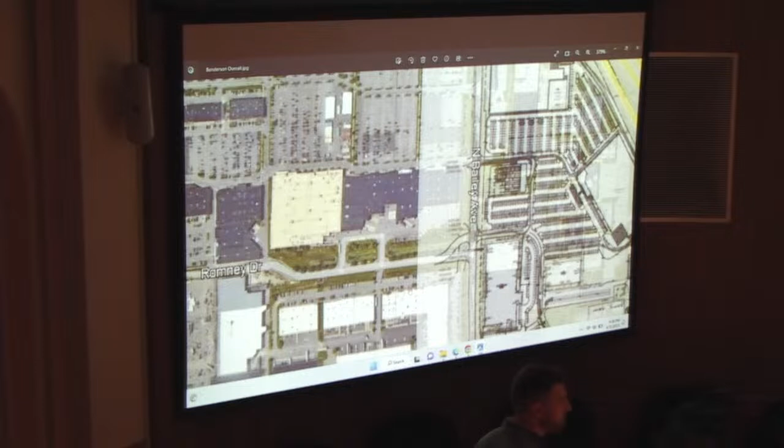They can move it, realign Romney and put it on the other side of the 290. Make it a pool shop. Just a pipe. There you go.

I'd say probably not for this. I mean, they have shown willingness to make alterations at that particular intersection. Right, but we kind of shot that down.

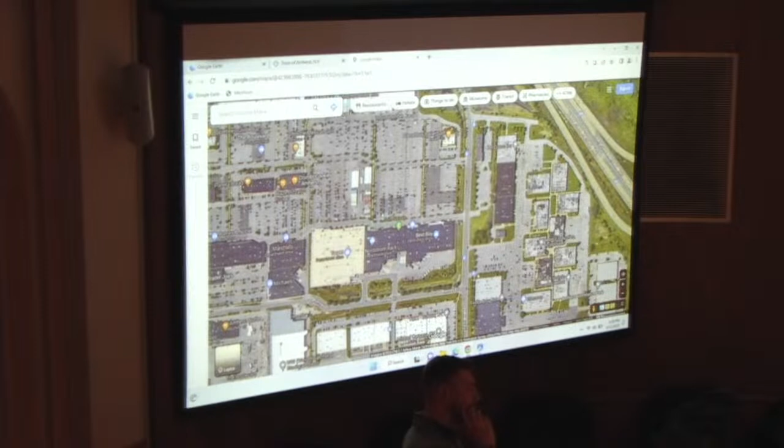Romney almost just needs to go away. What would be, just curious that I say that. You can't do it though. I mean, if you just shut Romney down instead of making it tie in there. How much traffic is on Romney now if you don't have that? Yeah, but there's gonna be a lot. Where does it go? Yeah, that's what I mean, you can't, it's just in a horrible spot.

Can't we just go back to having Romney Boulevard as a mall and put all these stores in a mall? We'll go back there in 30 years, don't worry.

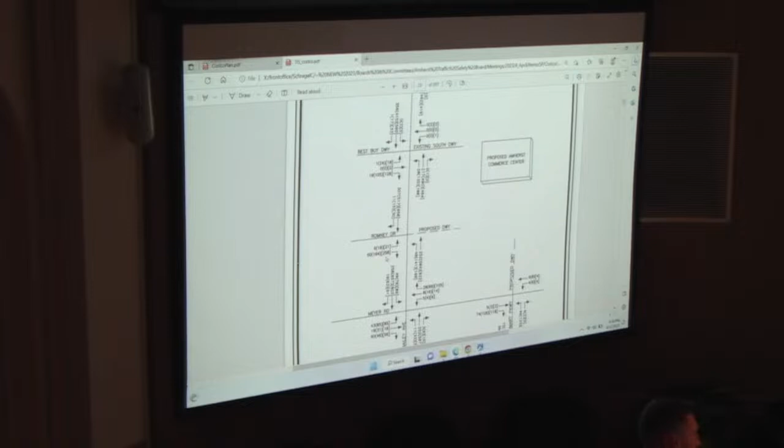4,200, is that average daily traffic? Okay, what figure is that? Should be at the bottom. Oh, that was one page away. Yep, thanks. 4,000? 4,200. So that's measured. We got a lot of vehicles there.

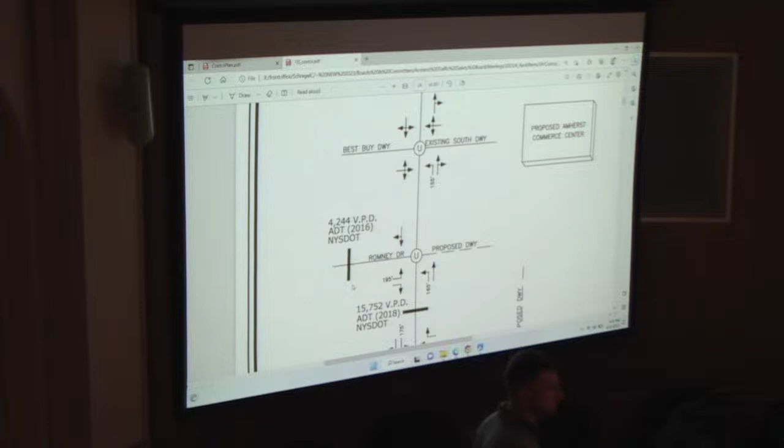Well, I think we take a look at it when they give us a new plan. Yeah, a lot of speculation going on. Do you think we'll see this multiple times before they finally get the green light, or just one more time?

Yeah, early May. We have our next meeting on May 3rd, and whatever we tell them to do, they'll have a shovel in the ground Thursday after. When do the new plans come out? This time next year, so. Yeah, so if they want to be on the May planning board meeting, sufficient enough time to review those. You guys review fire, engineering, everybody.

Ooh, that's what they're gonna put in that spot. Chick-fil-A, right in the middle. Costco, if you have a card.

I like it. You guys see any value in inviting Benderson here to discuss this? Wouldn't be opposed to it. You're gonna try to do it all in one night probably. Think there'd be any problem with that? People would.

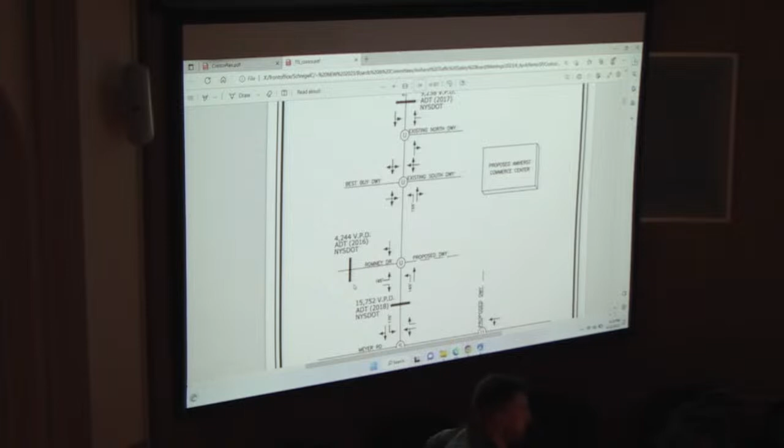I mean, this isn't getting any public. What's the May agenda look like? Because this one's so close to the May one, I think it's gonna be a light agenda. We got one item. I don't think they're gonna want to sit through 3.5 hours to describe this, but if they know they can be in and out of here.

1,000 and change per trip? Just over $1,000 per trip. It's not insignificant. Sounds to me like a lot of money for a roundabout. Yes.

The thing is, the signals work, so they'd be willing to make it work, and they're on the hook. The mitigation fee does not pay for the signals, they're gonna have to pay for the signals. But would they be willing to pay for roundabouts? I don't know, that's a decision higher than my pay grade. But the mitigation fees might be more useful somewhere else than the roundabouts.

In the town, you can use them any place you want. No, just in that big triangle he identified. Okay, that triangle, the golden triangle.

So if you're really bored looking for something to read, the GEIS is pretty lengthy. It covers a lot of traffic stuff, traffic zones, the BCD is broken up into like 9 zones. I thought it was more, but we projected it to 2040, that's the build date. So we took a look and said, what's the most optimal build out for this redevelopment? We modeled it and said, where's it gonna break at 2040? Then all these projects popped up, identified as multiple lanes at this intersection. So North Bailey, 5 lanes, and there's a cost associated with that. We take that cost and back into this mitigation fee we're talking about, at $1,000. That's kind of it in a nutshell.